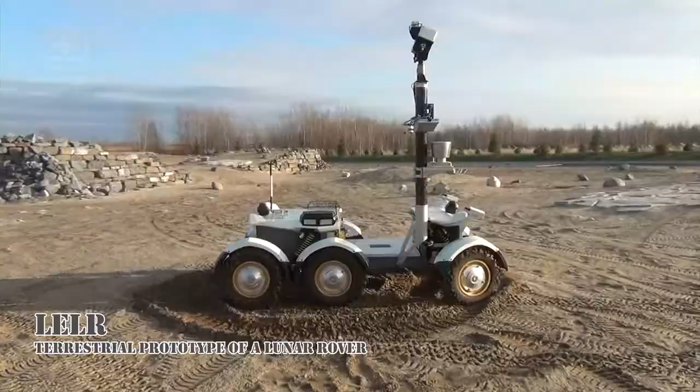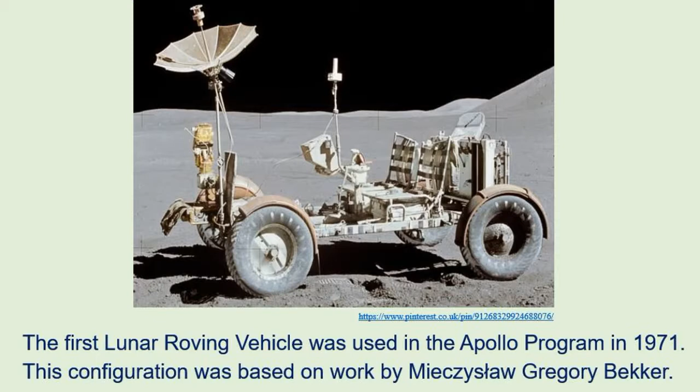The first lunar roving vehicle was used in the Apollo program in 1971. This configuration was based on work by Mieczysław Gregory Bekker.

Mieczysław Bekker was born in Poland and graduated from Warsaw Technical University in 1929. In 1942, he accepted an offer from the Government of Canada to move to Ottawa to work on armored vehicle research. He joined the Canadian Army in 1943 as a researcher and reached the rank of Lieutenant Colonel. In 1956, he moved to the United States.

Mr. Bekker's engineering achievement was acknowledged in a special diploma which reads: 'In recognition of outstanding scientific contributions to the Lunar Roving Vehicle Program, his leadership and pioneering efforts in the development of a methodology of the mechanics of off-road locomotion, the conduct of research on the physical characteristics of the lunar surface, and the evaluation of locomotion concepts later culminated in the highly successful development of the lunar roving vehicle, the first manned vehicle on the moon.'

The outstanding performance of the rover provided a greatly increased range of exploration, significantly increasing the scientific accomplishments of Apollo missions 15, 16, and 17.

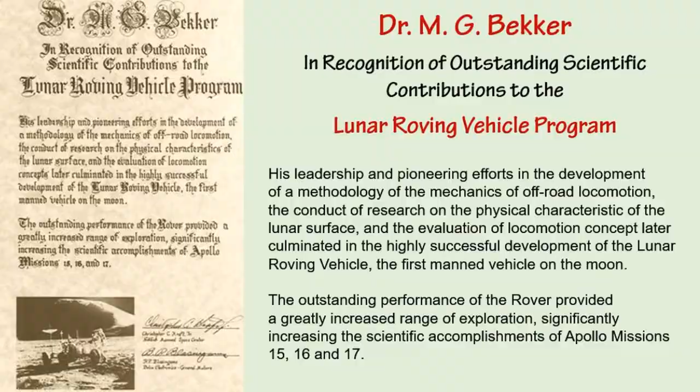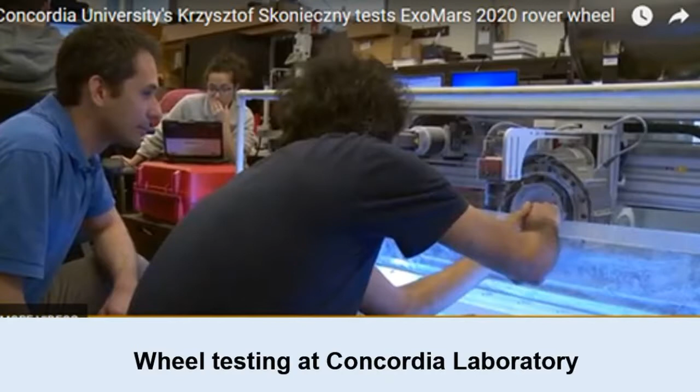At the present time in Montreal, Krzysztof Skonieczny, assistant professor at Concordia University, is conducting his own research related to the newest Mars rover vehicle. His busy schedule includes the newest wheel testing at Concordia Laboratory. A new Mars rover, slated to launch in 2020, may well incorporate a Concordia University wheel design.

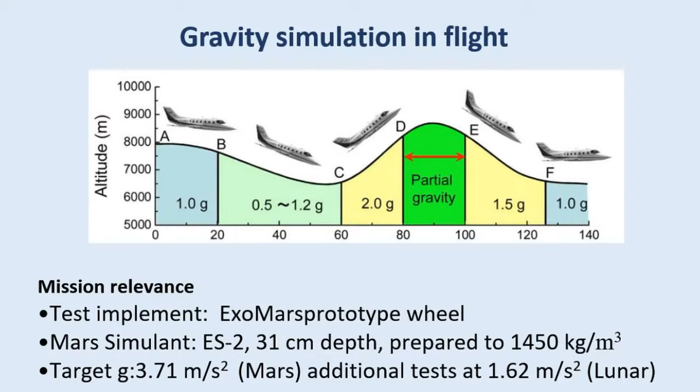To understand the complexity of Mars' environment, Krzysztof Skonieczny took flights over Ottawa in March 2018 to recreate the gravity of Mars. Gravity simulation in flight was achieved by special maneuvers conducted by the pilot for the purpose of reaching the target gravity. Krzysztof Skonieczny says, 'I'm not shy with my excitement about the cool things we get to learn.'

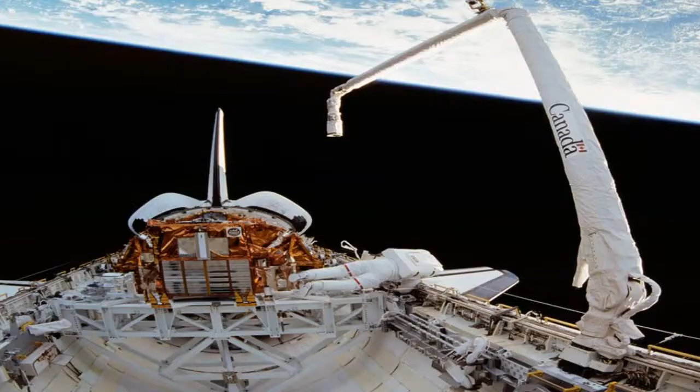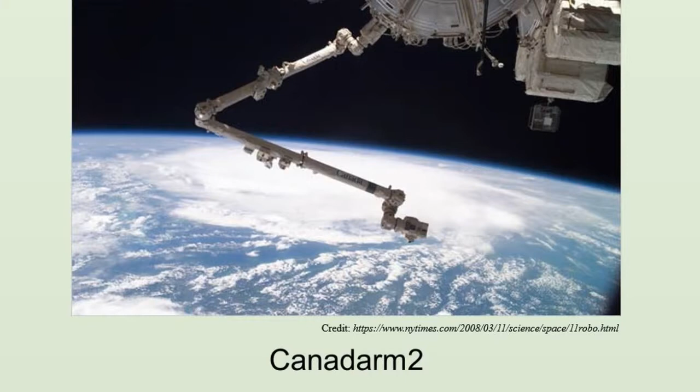Canadian involvement in space exploration is recognized by the famous Canadarm. The first Canadarm-1 was installed on shuttles. Witold Krzywiecki, through his aerospace work applications and projects as a senior stress engineer, was involved in the Canadarm-2 project. The new Canadarm-2 is installed directly on the space station, performing flawlessly very complicated tasks.

Witold Krzywiecki provided stress and structural analyses of the Space Orbiter Shuttle and space station robotic structures. He was also involved in design approval and development of flight components of the Space Shuttle robotic arm.

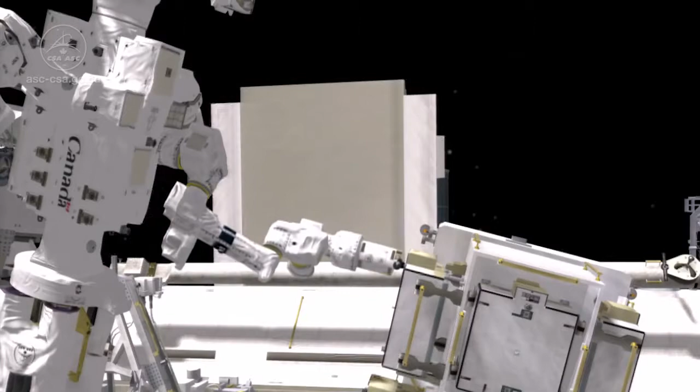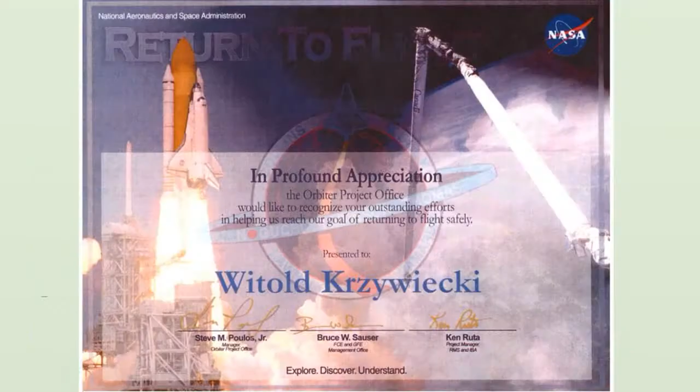Witold Krzywiecki was involved in the engineering of the space station robotic arm and special purpose dexterous manipulator. For his work, he was recognized by NASA's Profound Appreciation Diploma.

Aerospace manufacturing is a major industry in Canada. One of the biggest is Cyclone Manufacturing in Mississauga, Ontario. Cyclone Manufacturing was founded in 1964 and engaged in aerospace in 1978. Cyclone Manufacturing is privately owned and operated by Andrew Sochaj since 1990.

Vertically integrated machining, fabrication, assembly, and processing. Original equipment manufacturing approvals with Airbus, Bombardier, Boeing, Embraer, Lockheed Martin, IAI. 5 facilities, 400,000 square feet, or 37,000 square meters, in Canada and Poland. 110 CNC machining centers, including 55 of 5-axis. 750 total employees. Total revenue for 2017 was $98,250,000 Canadian. Cyclone Manufacturing specializes in manufacturing small to large structural aerospace components and assemblies such as wing structures, flight control surfaces, aerostructures, and assemblies.

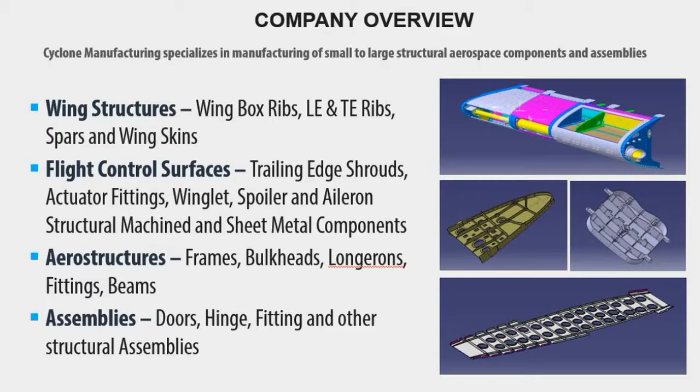The company timeline: starting with one computer numeric controlled machine in 1981, the company expanded to over 100 of these machines in 5 manufacturing locations. Cyclone Manufacturing is in the top 1% of the largest privately owned aerospace companies in North America.

The owner of Cyclone Manufacturing, Polish immigrant Andrew Sochaj, and his wife immigrated to Canada from Poland in the late 70s, and he began working at Cyclone when he started his work there. From his humble beginnings, he quickly became highly regarded as an excellent employee, establishing the base of operations and directing several projects for his superiors.

Through hard work and dedication, in 1990, Andrew acquired full shares of Cyclone Manufacturing, and over the years grew this entity from a 24,000 square foot facility to over 400,000 square feet, working alongside and developing long-term relationships with world-renowned aerospace OEMs, original equipment manufacturers.

Never satisfied with the status quo, Andrew Sochaj continues today to lead company development through innovation and leadership. He is a graduate of the University of Lublin, Poland, and holds a Bachelor of Engineering degree. As a community leader and a patron of the arts, he is involved in community services. Mr. Sochaj, a proud father of 2 and grandfather of 5, has a strong belief in mentoring the younger generation to succeed.

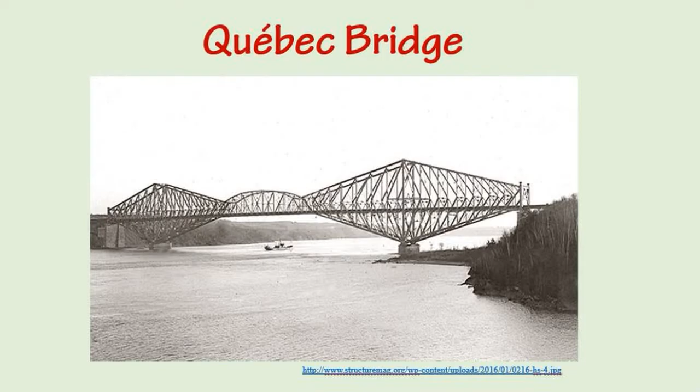Now, getting back to Earth and some Canadian history of engineering. This is the Quebec Bridge. In 1900, construction began on the Quebec Bridge, which linked Winnipeg to Moncton on the National Transcontinental Railway.

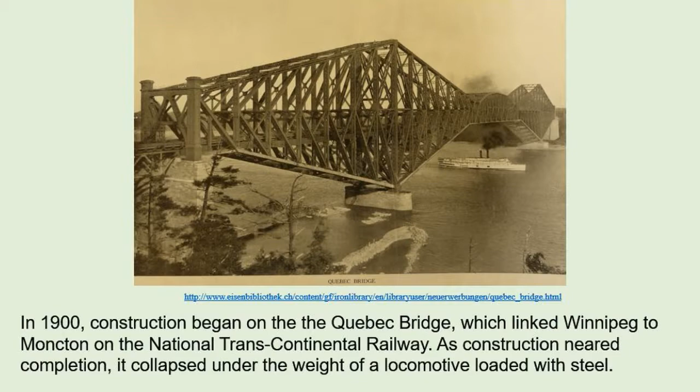As construction neared completion, it collapsed under the weight of a locomotive loaded with steel. 75 people were killed, and a subsequent inquiry showed the accident was due to an error in judgment by the engineers who designed the bridge.

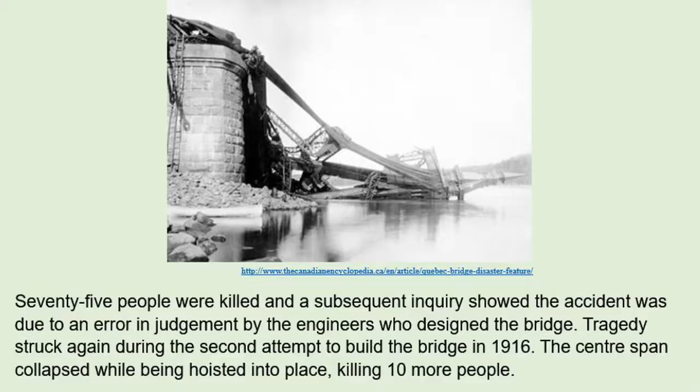Tragedy struck again during the second attempt to build the bridge in 1916. The center span collapsed while being hoisted into place, killing 10 more people. The bridge was eventually rebuilt thanks to a Polish engineer, Ralph Modjeski.

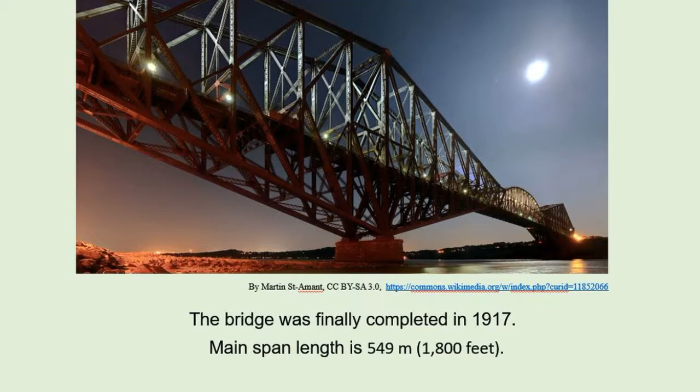Ralph Modjeski was a Polish civil engineer who achieved prominence as a preeminent bridge designer. He took over the misdesigned Quebec Bridge after the 1907 disaster that killed 75 workers, and succeeded in creating the longest truss span in the world in 1917. It is still the longest cantilever bridge in the world. The bridge was finally completed in 1917. The main span is 549 meters, or 1,800 feet in length.

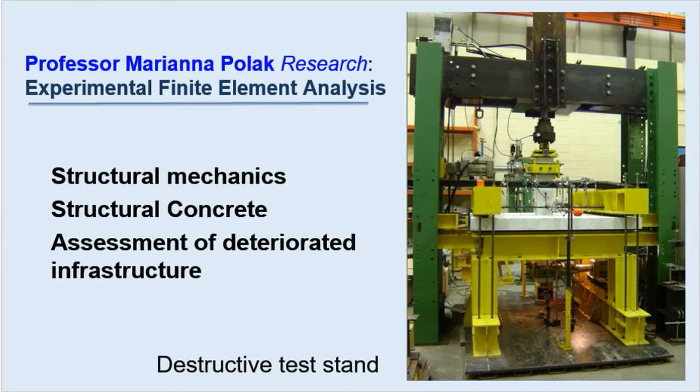As for current engineering notables, there are a number of scientists like Ms. Maria Marianna Polak, Professor of Civil and Environmental Engineering at the University of Waterloo, who earned her PhD at the University of Toronto and Bachelor and Master of Science degrees at Krakow University in Poland. Marianna's interest is in structural mechanics, structural concrete, and assessment of deteriorated infrastructure.

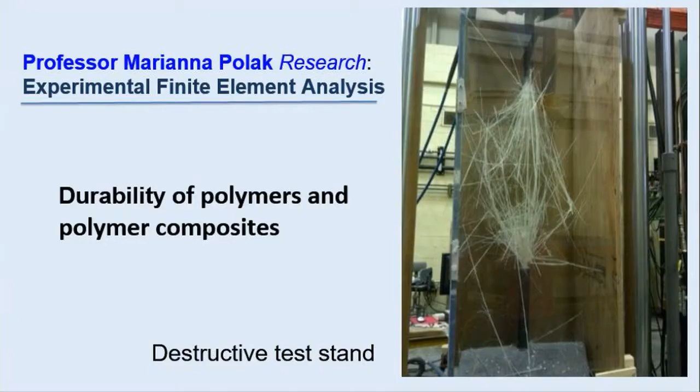Her other interests include the durability of polymers and polymer composites, as shown on the picture of a destructive test stand. The non-destructive detection of damage in concrete is conducted during laboratory tests. Maria Marianna Polak was a visiting professor in Germany and Poland. She contributed to the development of North American and European design standards. She is also the author of over 200 technical publications.

For subway enthusiasts, Jaroslaw Skonieczny, manager of subway vehicle engineering, shares his knowledge of the Toronto Transit Commission. The subway map of Toronto is very impressive, creating no small feelings of envy for people living in Ottawa. The numbers for Toronto Transit Commission are very impressive.

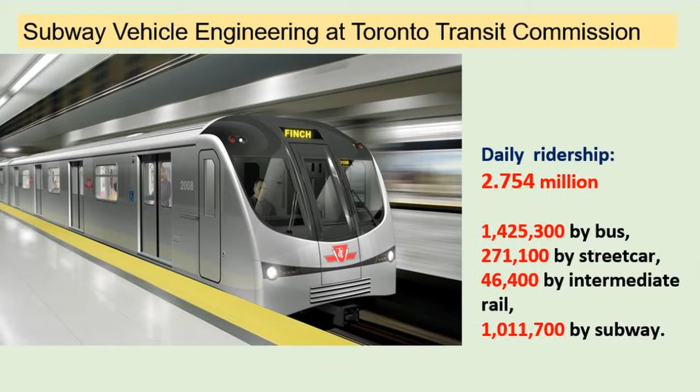Daily ridership over 2.7 million, in which 1.4 million go by bus, 271,000 by streetcar, 46,400 by intermediate rail, and over 1 million by subway. The Lost Articles team works tirelessly to reunite more than 4,000 items at any given time with their owners. So visit Toronto, ride for your pleasure, says Skonieczny, manager of Subway Vehicle Engineering at Toronto Transit Commission.

Let's check some engineers in Ottawa. Wojciech Remisz is president of Remisz Consulting Engineers Limited. He is founder and principal of the firm, a designated consulting engineer since 1992, with over 40 years of extensive work experience. He is licensed as Quality Verification Engineer by the Ministry of Transportation.

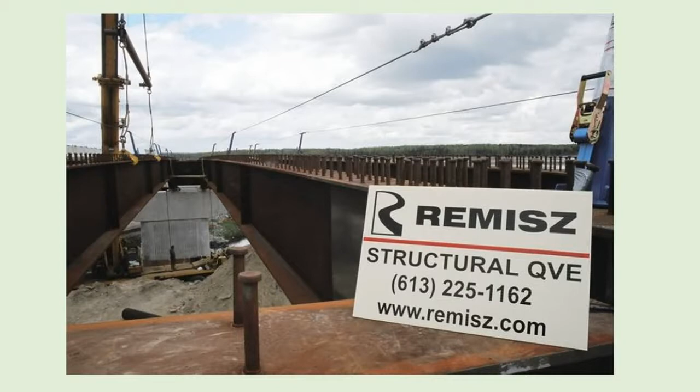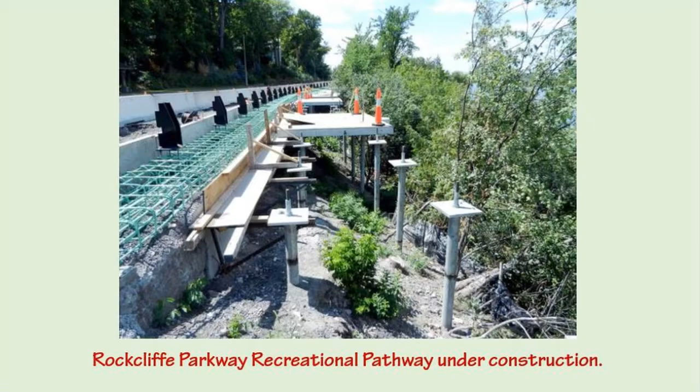His company was involved in the rehabilitation of Ivy Lea Bridge at Thousand Islands Customs border crossing, providing structural reinforcement utilizing a super innovative suspended working platform. A very challenging project in his career was the Rockcliffe Parkway Recreational Pathway, as seen under construction. This project is unconventional, with a unique structural system providing technical innovation and excellence. Consequently, Remisz's company was recognized with the Willis Chipman Award, in recognition of the project that best demonstrates the contribution of consulting engineering to the social, economic, and environmental well-being of Ontario.

The current project, in collaboration with other companies, is the creation of rail links within the Ottawa region known as the Moose Project. When completed, it will provide much-needed connectivity between rural communities and the urban Ottawa-Gatineau region.

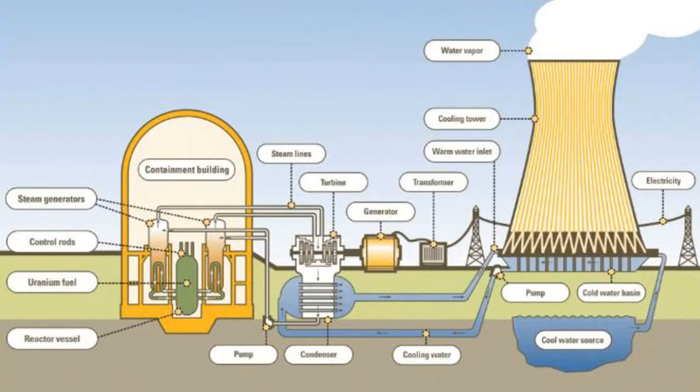Nuclear energy is a very fascinating subject. Nuclear power stations provide electricity for all of us. Nuclear energy is used to heat water to create steam, which turns the turbines connected to a generator. Nuclear power stations do not produce any carbon dioxide, as do coal and gas-fed power stations. What is often mistaken for fumes is only water vapor generated by these cooling towers.

One of the nuclear specialists is Stefan Baginski, with past and present membership in many engineering associations. Baginski Engineering Limited offered a completely new solution for much-needed maintenance that saved over $250 million per reactor, resulting in total savings for the Pickering Nuclear Power Plant of $2 billion in 1981 dollars.

Dr. Baginski proposed extremely mobile robots climbing between pressure tubes in very restricted spaces. The moving robot provides structural support for tools that were cutting the pressure tube and re-welding it back again. This operation was filmed for the Federal Safety Regulator, who issued the operational license based on records of work performed.

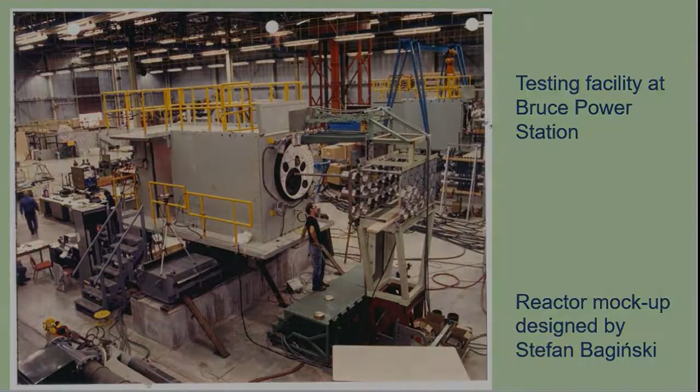The testing facility at Bruce Power Station. This picture shows Stefan Baginski with the reactor mock-up, robots, and controls.

If you wonder who designed the National Arts Centre in Ottawa, the answer is Polish-born architect Fred Lebensold. NAC was built between 1965 and 1969 and was later designated as a National Historic Site of Canada. As you have just seen, engineering is a fascinating way of life. Thank you for your attention.